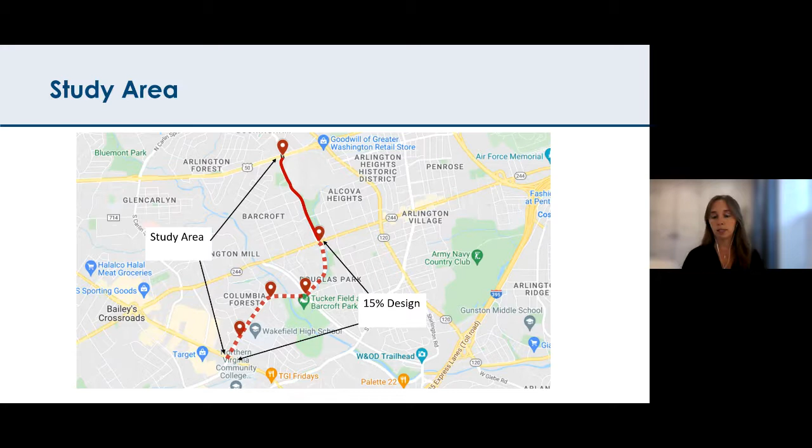You can see there's a dash line here, and that's where we're doing a 15% design. So that basically means we're going to design this portion out really so we can submit grant applications. And this is really a timeline that's driving this study. We're hoping to submit grant applications in the winter of this year and early 2023. So that's something we're keeping in mind as we're doing engagement.

Because it's a 2 mile corridor, which may seem short, there's so many resources and different things going on along South George Mason that we broke it up into 3 different segments.

You can see here segment 1 is highlighted in yellow, that is from Arlington Boulevard to Columbia Pike. Segment 2, highlighted in pink, is Columbia Pike to South 4 Mile Run Drive. And segment 3, in teal, is South 4 Mile Run Drive to the Arlington-Fairfax County line. For anyone wondering, the cutoff is really closer to South Dinwiddie if you want an exact location.

So existing conditions - this is what we heard in those April engagements that Nate mentioned earlier.

We had a community kickoff meeting online, similar to what we're doing now, on April 6th. During that virtual meeting we also launched an online feedback questionnaire and interactive map, and we had really high response rates, which was great. About 404 people submitted 625 comments, which we'll talk about shortly. We also had in-person walking tours focusing on Barcroft, the area with South 4 Mile Run Drive, and Alcova Heights as well.

So who did we hear from in this online questionnaire? It was open for about a month, so we heard from quite a few people. A large amount of respondents were from the 22204 zip code, which is around the South George Mason corridor. We heard from about 76% of people who live in Arlington, 42% who work in Arlington, and importantly, 5% of respondents said they had a disability that impacts their mobility - something we need to think about when providing multimodal transportation for all on this corridor.

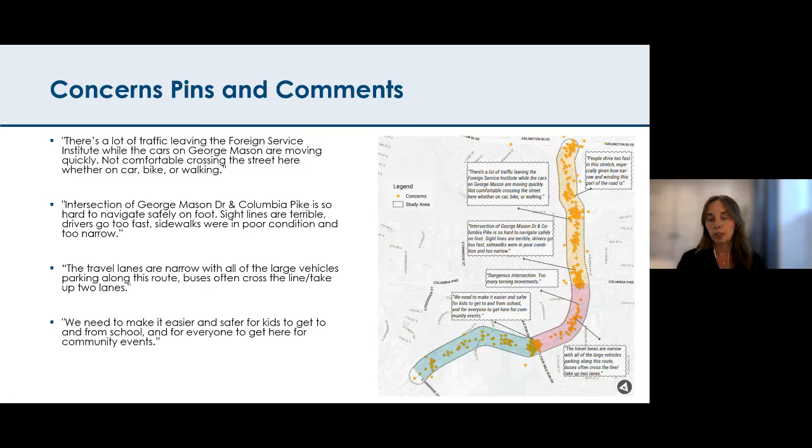Another major concern from the public was intersections. This next phase of the study, phase 3, will dive into more detail at intersections, which will help us better understand how to apply the preferred concept along the corridor. So we heard those comments on intersections, and we will be addressing them in the next phase.

Next, please. Here were a few comment themes. We had about 625 comments, so we grouped those into general themes. In this first bullet point, regardless of how people traveled, many road users focused comments on complex intersections at Arlington Boulevard and 4 Mile Run Drive. As shown on that map I mentioned earlier, 4 Mile Run Drive and Columbia Pike are both Vision Zero crash hotspots, meaning there's a large amount of crashes at these intersections.

The second bullet point, entering South George Mason Drive from driveways and side streets, was another top concern, most prevalent among people driving to the Foreign Service Institute or National Foreign Affairs Training Center. Third, people cycling were particularly challenged by the Columbia Pike and A Street intersection. So once again, that concern with intersections is something we will be working on for phase 3.

Next, please. This is data collection and analysis. For this phase of the study, we completed data collection to understand how many people are using the corridor today. Next slide.

We looked at sidewalks along the corridor and crossings, which is what you can see here. We did an inventory to see what exists, but what's important to talk about here is the existing planning guidance, like the MTP and Vision Zero. Those are components that are going to shape this study.

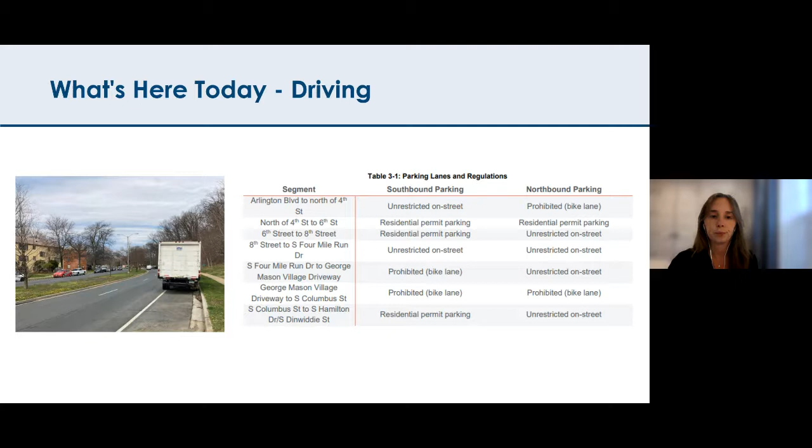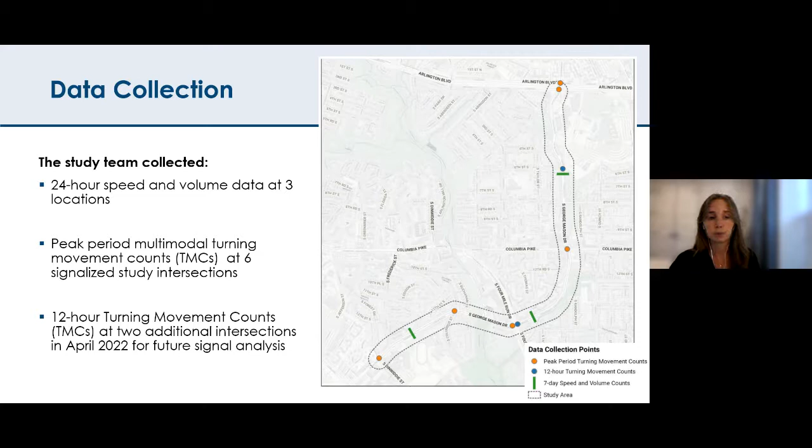So right now we're looking at data analysis volumes and peak hours. Volumes show how many people are on South George Mason at different times of day - the busiest time, or when there are the most cars, buses, etc. This is the peak hour. There were some pretty typical patterns from the data we collected. Each 7-day count location has a very distinct weekday morning and afternoon peak. The PM peak generally experiences higher traffic and for longer than the AM peak, which is interesting and something we need to think about for increasing capacity.

It's also important to note that northbound volumes are higher during the AM peak and southbound volumes are higher during the PM peak. Generally speeds tend to drop slightly during these peak periods, which you can see here. The AM peak period is about 7:30 to 8:30, with the PM peak period being 5 to 6 p.m.

We also looked at volume and speed and that relationship. The posted speed on South George Mason Drive is 30 miles per hour. During school, through Vision Zero, there's a school slow zone, so the speed limit at Wakefield High School during school hours is 20 miles per hour. That was shown on the map.

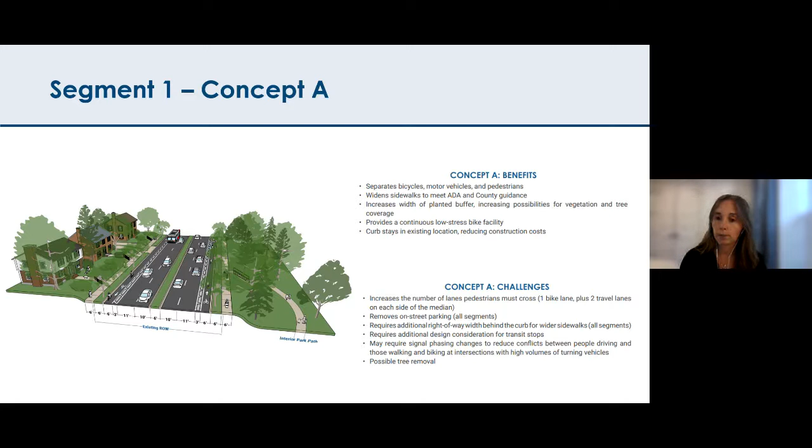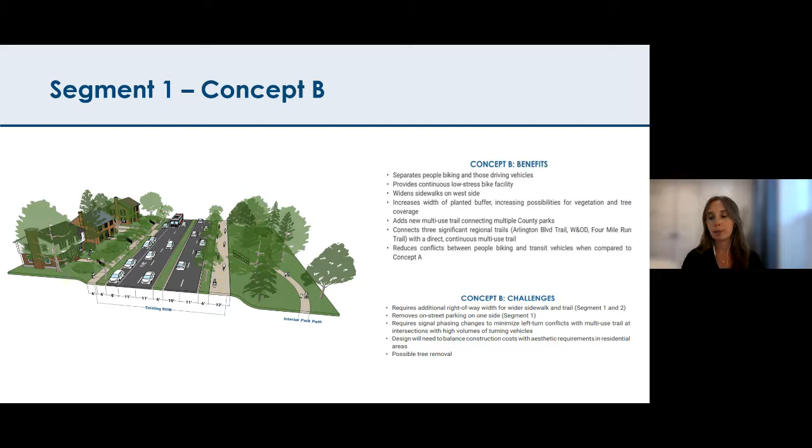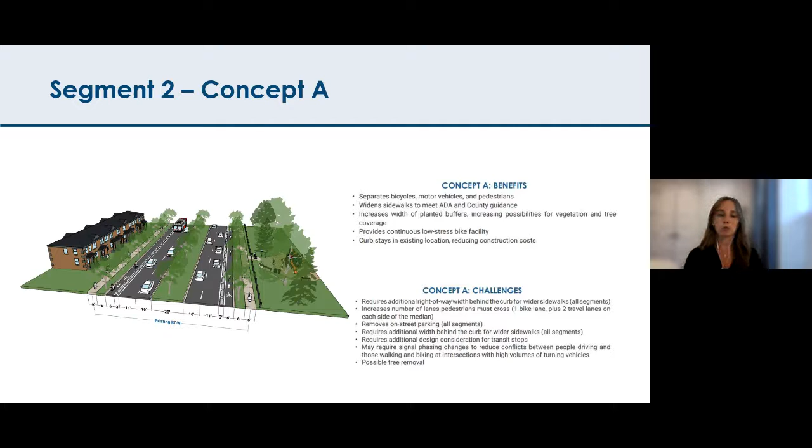We also have concept B. This is once again looking at Columbia Pike to South 4 Mile Run with this multi-use trail, widened sidewalk, widened buffer option. What are some of the changes here? We still have that 6-foot sidewalk, 6-foot plantable buffer on both sides. We do have parking remaining with 8 feet and vehicular lanes at 11 with that 20-foot median and the 12-foot trail.

So some benefits and challenges: it separates bicycles and motor vehicles, provides continuous low stress bike facility. It widens the sidewalk to meet ADA and county guidance. Once again, has that planted buffer to increase vegetation and tree coverage. It adds a new multi-use trail, which connects to park, and could also connect to those 3 significant trails, 2 existing, 1 in the works. It reduces conflicts between people biking and transit vehicles compared to the concept with the separated bike lanes.

Challenges: requires additional right-of-way width for wider sidewalks and trails in some segments, requires some parking removal to maintain sight distance at intersections and driveways in segments 2 and 3, requires signal phasing changes to minimize left turn conflicts with multi-use trail users at intersections. There's high volumes of turning vehicles at places like South 4 Mile Run Drive and Columbia Pike. This design will need to balance construction costs with aesthetic requirements in residential areas, and also possible tree removal.

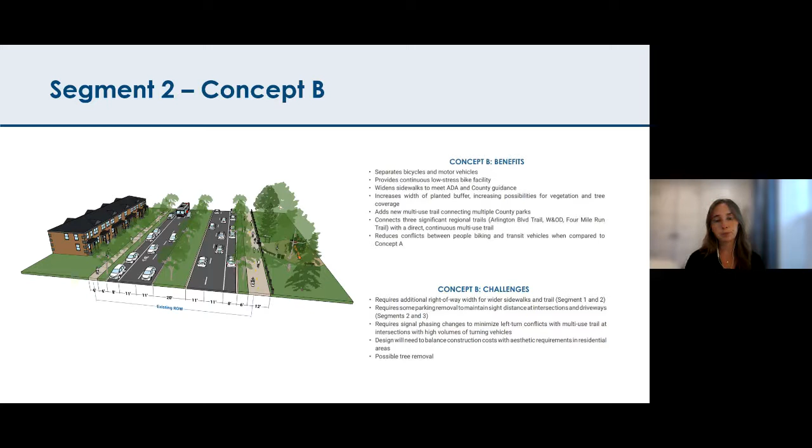Next slide. This is the final segment: South 4 Mile Run Drive to South Dinwiddie Street around the Arlington-Fairfax County line. This is what's here today: there's 4-foot sidewalks on both sides, about 3-foot planted buffer, 7-foot parking on both sides. All of the vehicular lanes are 12 feet and about a 24-foot median in the middle of the road.

So this is what this segment could look like with concept A, which is separated bike lanes. You can see we have that widened sidewalk, 6 feet, planted buffer strip, 6 feet, same with the separated bike facility with that 3 feet. And we have reduced the vehicular lanes. It's important to note that we always have to leave that outside lane at 11 feet in order to accommodate buses. In this condition, the median remains at that 24 feet.

Next slide. So the concept and the benefits are similar to the other segments for this separated facility widened sidewalk scenario. It does separate bikes, cars, pedestrians. It widens the sidewalk to meet both ADA and county guidance. There is an opportunity for additional vegetation and tree coverage, having these 6 feet on both sides. It provides a low stress bike facility throughout, and because the curb stays in the same location, it could reduce construction costs.

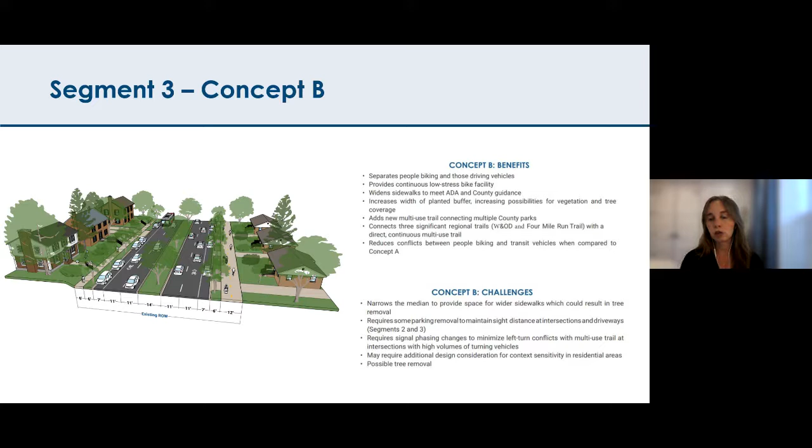It reduces conflicts between people biking and transit vehicles when compared to concept A with the separated bike lanes. Some of the challenges: it does narrow the median to provide space for wider sidewalks, which could result in tree removal. It requires some parking removal to maintain sight distance at intersections and driveways in segments 2 and 3. It would require signal phasing changes to minimize conflicts, specifically at intersections, and would probably require additional design consideration in residential areas, like how it interacts with driveways and sidewalks, and also possible tree removal.

Next slide. So that was quite a bit of information that we can review in the Q&A. I will pass it back to Nate to talk about public engagement and next steps.

Thanks, Leah. So we are in the beginning of this phase of public engagement, again focused on those concepts you just saw with Leah. I want to highlight where we are in that timeline. We are at the beginning of the height of our public engagement, really in a two-way dialogue with members of the public, attendees, folks who fill out the online feedback form, about these concepts, about the trade-offs contained therein, and about getting community feedback on how we meet the goals of this study.

So I have a couple of questions already in the queue, which is great. We'll talk about that as we get into the discussion here. But before we do that, I want to point out where we are. We have another phase of involved-level community engagement with the workshop on intersection concepts, the next phase of public engagement in the fall, and then we'll move into commission briefings and finalization of the study report towards the end of the year.

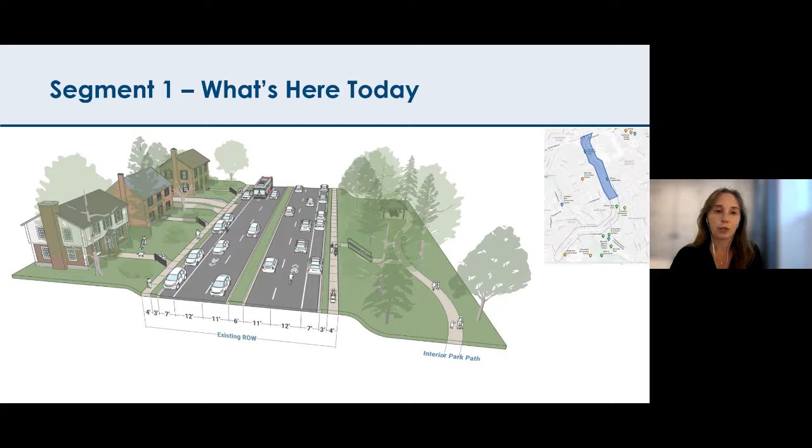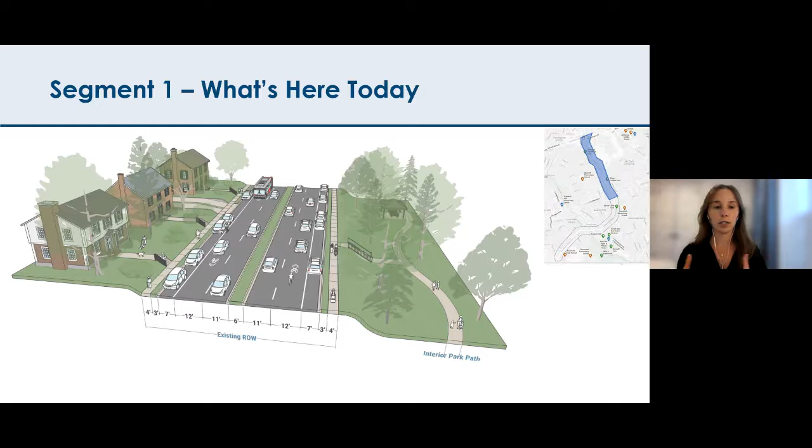We heard from the first round of public engagement that people wanted separated bike lanes. We need to maintain transit ridership and improve bus stops. People also wanted to keep vehicular lanes, but also widen sidewalks. So at some point, there has to be some sort of trade-off. These are really broad, general concepts. As we progress to the next phase, we will look at it on a block by block basis. Segment 1, Concept A generally talks about removing parking throughout the corridor, whereas Concept B talks about spot parking removal, and that's where the more granular block by block analysis will really focus. Thanks for that, Leah.

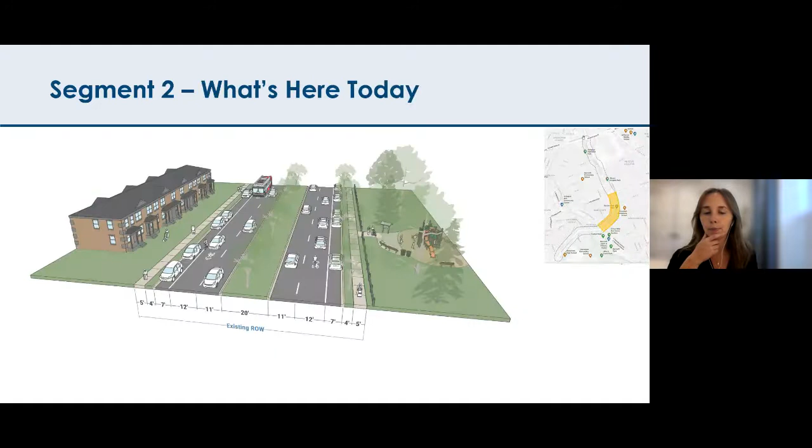Concept A, which is the separated bike lanes, widened sidewalk, and widened buffer, proposes parking removal in all segments - 1, 2, and 3. So I think this question may be referring to concept B, the multi-use trail. It removes parking in certain situations like intersections or small spots that we'll talk about in the next phase as we go block by block. But I don't believe we're just removing parking anywhere.

I do see one of the primary changes between segment 1 and segments 2 and 3 is perhaps the amount of right-of-way available, because in concept B for segments 2 and 3, parking is maintained on both sides of the street, whereas in concept B segment 1, the parking on the east side adjacent to the park is eliminated. Maybe we can highlight the difference there in terms of existing right-of-way.

Yeah, so that, like Nate just said, goes back to existing right-of-way. You can see here this blue bracket underneath showing the existing right-of-way, which is really what we're looking at now, and you can see how the sidewalks at 6 feet expand to either side. We're really working within this limited space. One benefit of concept A is that we're not rebuilding or moving out the whole right-of-way, the whole curb, so there would be cost savings associated with that. Concept A stays within the limits of existing right-of-way and moves things behind the curb rather than within the curb, which would include parking.

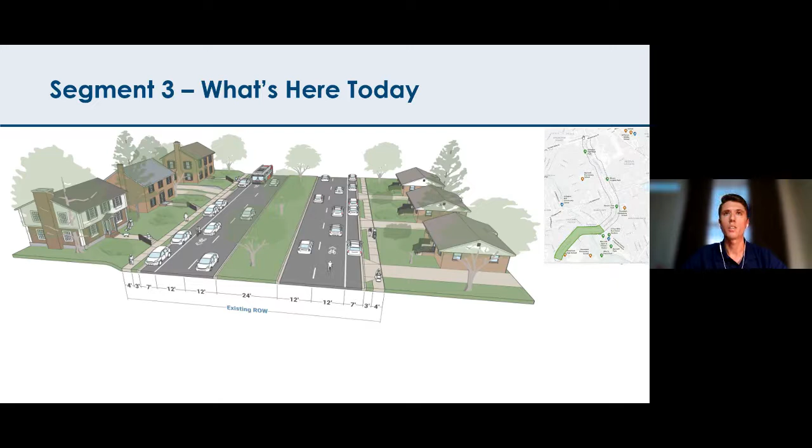I have another example too - the recently renovated Custis Trail on Lee Highway, US 29 in Rosslyn, which is a 16-foot trail, is another example of a multi-use trail directly adjacent to an arterial road with a high speed limit. It's just for a few blocks, but that 16-foot trail from the Air Force Association building down to where the Custis Trail heads towards Theodore Roosevelt Island resembles the cross section you see here in concept B, segment 2, where you have a multi-use trail, a buffer, and an adjacent roadway. That's a great question - where does this condition exist elsewhere in the county? We've also been working on precedent images for these concepts using Arlington examples and examples from around the country.

For the boards at our community meeting on Wednesday, if you're not able to make the community meeting, you'll be able to see those boards as a PDF on the project website right afterwards. So stay tuned for that on the project webpage, or join us Wednesday night at Randall.

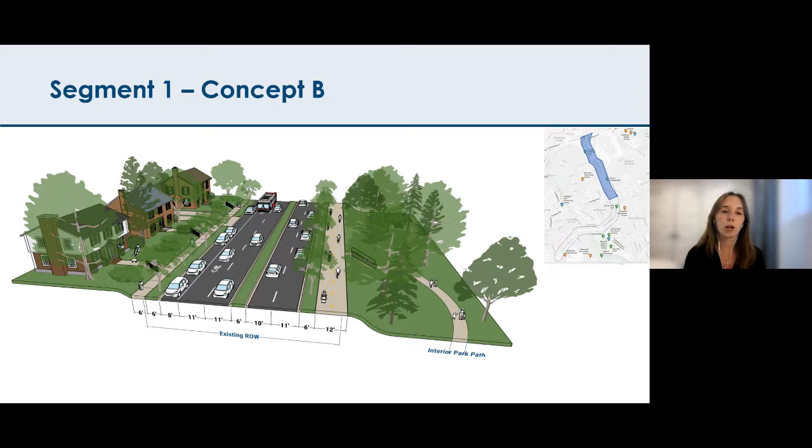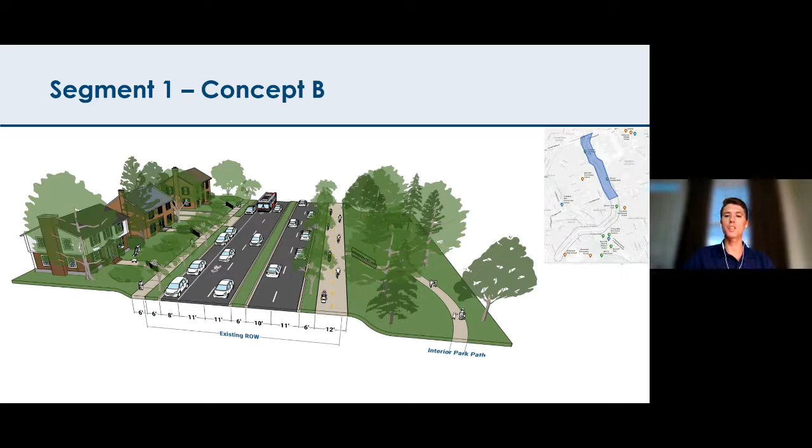All right, thanks Leah. We've gotten some more questions here. Allison jumps in with a clarification. She meant the literal park itself: how much space would be lost in the parks themselves in this scenario, not necessarily the parking.

That's a good question. You can see from this graphic where it extends from. I'm trying to do the math in my head. I believe it's a 4 foot sidewalk with a 3 foot buffer, and we're proposing a 6 foot buffer and 12 foot trail. Then there's this segment for the parking lane too.

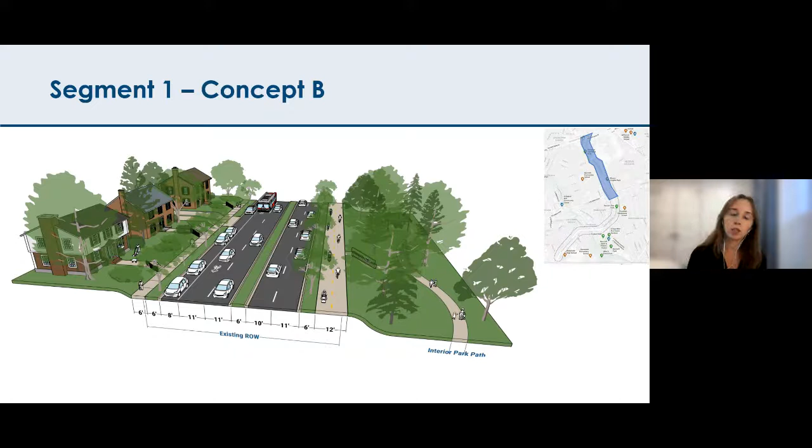This segment would mostly be extending not into the park, but into the roadway. I should also mention we've been coordinating closely with Department of Parks and Recreation, and for specific parts like Alcova Heights, it would be very hard to extend into the park because there's a pretty steep slope, and it would cause drainage issues if we extended that way. That's why we're talking about extending into the road rather than into the park, and that's a conversation we're maintaining throughout all of these segments.

Does that hold true, again framing it as park not parking, for segment 2 concept B? It does appear that that is a bit different in the park, because there isn't as steep a grade here, and it's generally flat, so there is some room. Once again, we're working with Department of Parks and Recreation to see what we can do. We have people that work in urban forestry and people that work on natural surface trails, so we're trying to balance people seeing the trail as an amenity to the park versus something that's infringing on park space, because if we do it correctly, I think it can be an asset.

Okay, great. Let's do this. We've got another question here about trade-offs. I think this is a good one. I'm going to put myself back on screen. Comment from one of our attendees tonight: why are you putting more value on preserving a green median than the homeowners who will lose a lot of access to their homes? I assume we're using the word access here in reference to parking. Can we talk about trade-offs between the median in various segments and parking?

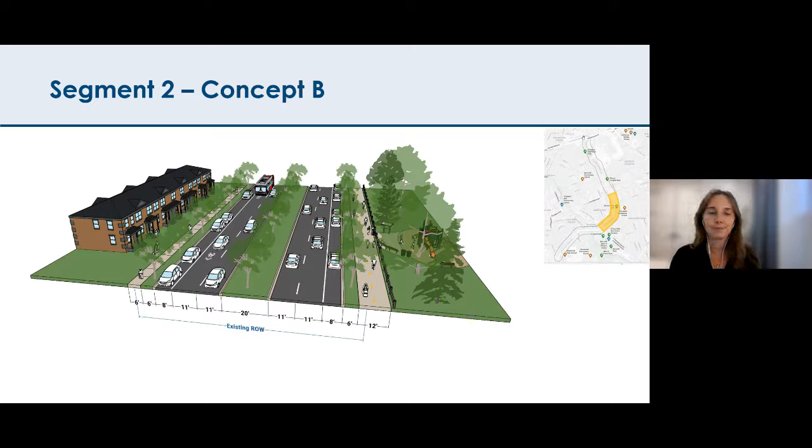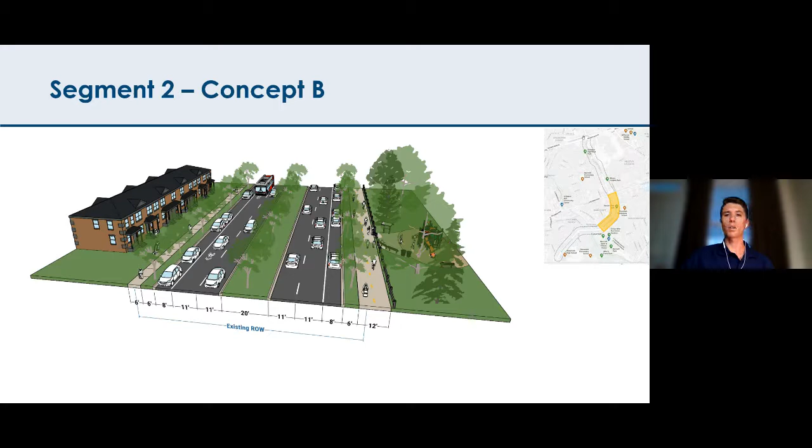Thank you so much. Another comment, following up on Jason's earlier question about precedent for multi-use trails alongside roadways in the county. He says it would be helpful to understand the frequent driveway interaction with a multi-use trail. That condition doesn't really exist on the Custis or W&OD as far as I know, and that's a great point. Thank you for sharing that. I'm sure we'll hear more as engagement moves along, but I really appreciate you raising it. You're right that it's a unique condition, particularly for segment 3, because that is the segment where any proposed multi-use trail would cross driveways rather than being co-located with county public space.

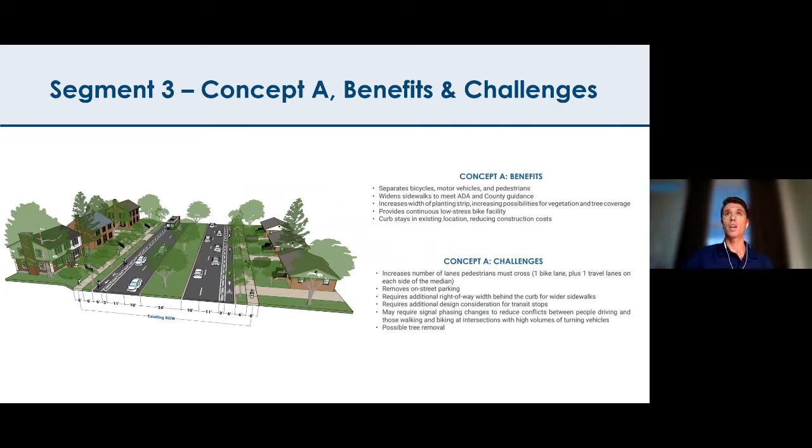On to the next one. A note from Anonymous about pedestrian refuges: there is currently no refuge for people crossing George Mason at Columbia Pike. Your point is correct and well taken, and we definitely heard about that in the online comment map for existing conditions. I won't scroll through it rapidly here, but the comment map in the slide deck, which will be available after the meeting, does clearly show an intensity of comments at the intersection of George Mason and Columbia Pike.

Okay, a quick question for Leah coming up next: what is the timeline for implementing these proposed changes? I'll caveat that by saying there are no proposed changes yet. The proposed changes will be the outcome of this study, which will conclude at the end of the year.

But Leah, can you tell us more about what happens once the study is finalized? Yes, of course. Once this study is finalized at the end of the year, we'll hopefully be able to submit a grant application for funding for that southern portion, from Columbia Pike South to the county line. We really can't say there's a timeline right now because we're in such a broad phase - that's really what a study is, just getting a vision, a general concept. From a timing perspective, I could generally say that because we'll have a 15% design at the end of this study, that segment would likely be implemented before the northern segment, but I can't give a timeline at this time. A lot depends on funding too, which is the reason for that concept.

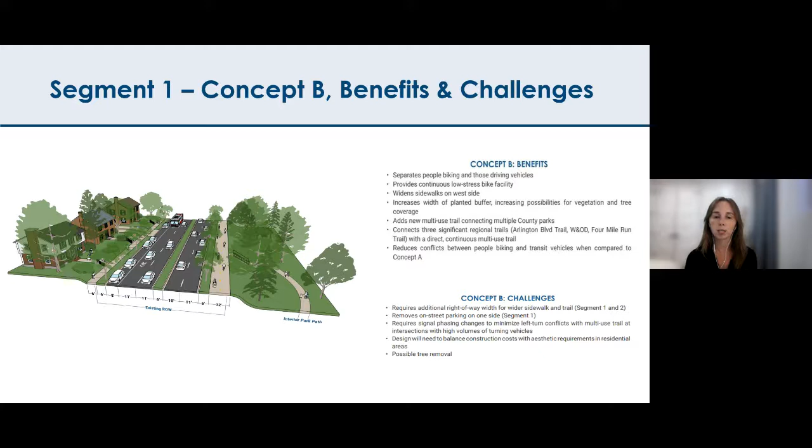Awesome. Thanks, Leah. All right, and last, a couple of comments here I will read aloud. The first is from another resident on segment 1. Someone that lives on segment 1: I completely agree with the frustrations of the previous commenter. Frankly, we should not lose the ability to park in front of our homes just so that someone, quote, 'might start biking.' It is completely impractical and it has a significant financial impact for us that you have not addressed at all.

Thank you very much for sharing your feedback today. That is, again, between yourself and the previous commenter, definitely something we have noted in this conversation. I'm sure we will hear from you and your neighbors in the online feedback form. Please do share that opportunity, and we will move forward with that feedback in mind.